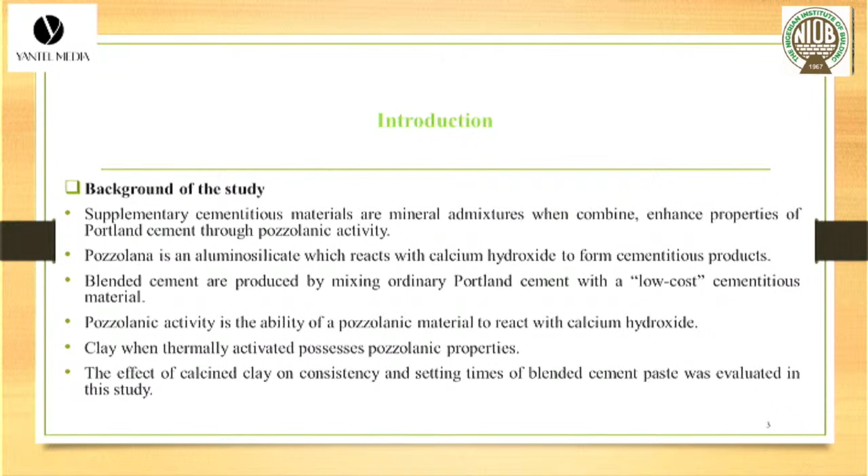So, statement of the problem. Many studies pertaining to supplementary cementing materials have focused more on concrete and often ignored the fact that the paste in concrete also constitutes a considerable percentage of the total concrete volume, as well as vulnerable to chemical attacks. The next slide, please.

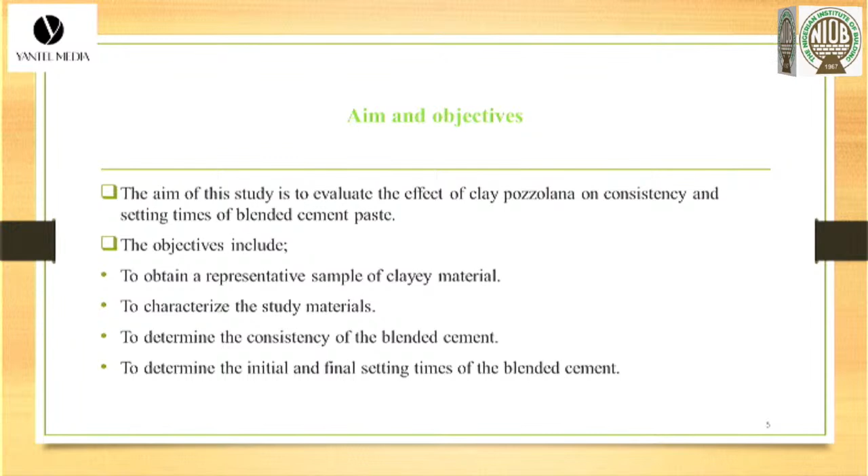So the aim of this study is to evaluate the effect of clay pozzolana on consistency and setting times of blended cement paste. The objectives include to obtain a representative sample of clay material, to characterize the study materials, to determine the consistency of the blended cement, to also determine the initial and final setting times of the blended cement.

The use of pozzolanic materials in cementitious systems has gained significant attention due to their potential to enhance the performance and sustainability of concrete. And consistency is a function of setting time and also relates to hydration of cementitious materials. Thus, the setting time of pozzolanic material is also a measure of its pozzolanic activity or pozzolanic reaction.

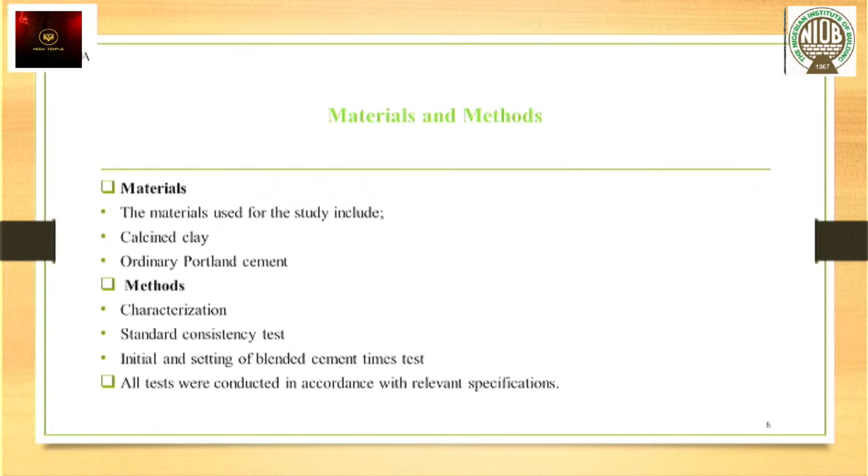after which the mixture of the clay and the palm kernel shell was noodleized in an equipment known as the noodleizer. After the noodleization, the noodleized product was fired in a purpose-built kiln in the NBRRI Pozzolana pilot plant at Ota, Ogun State. Next slide, please.

Results and discussion. Table 2 shows the chemical composition of the clay, which from the results you can see that the silica content in the clay material that was calcined was 63.36%, and the other oxide that was present in the clay in considerable quantity was the alumina, which is aluminum oxide, that has 16.36%, followed by iron oxide with 5.44%.

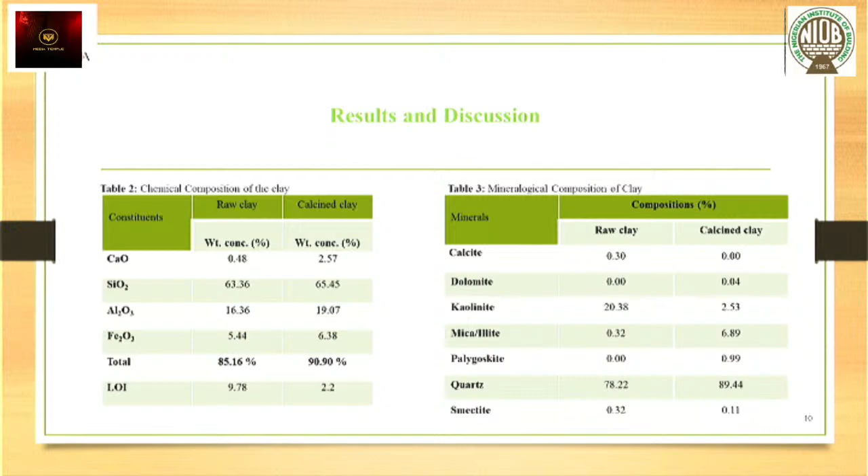So, figure 2 is the plot of the standard consistency of the calcined clay pozzolana OPC paste. So the consistency of a binder paste is the measure of the degree of wetness or fluidity of a prepared paste. It is the water affinity of the cementitious material. Thus, the consistency is a function of setting times of cementitious material. So the figure here shows the consistency results of the effect of the clay pozzolana when it was blended with the OPC.

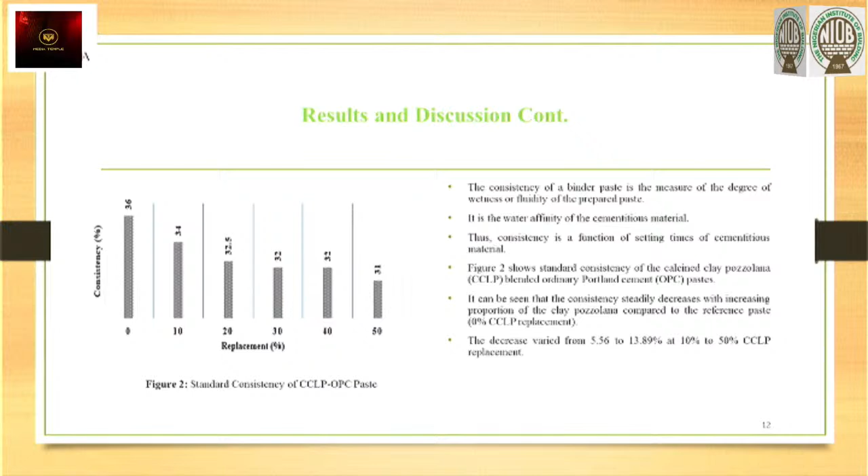And it can be observed that the consistency steadily decreases with increasing proportion of the clay pozzolana compared to the reference paste, which is the 0% addition of clay pozzolana. The replacement levels were at 10% replacement of the pozzolana by weight of the ordinary Portland cement, 20%, 30%, 40%, and 50% respectively. The decrease varied from 5.56 to 13.89% at 10% to 50% calcined clay pozzolana replacement. The next slide, please.

So figure 3 here is the plot of the initial setting time and final setting time of the calcined clay OPC blend. Setting time, as we know, is the time required for stiffening of cement paste to a defined consistency. Stiffening, on the other hand, is the loss of consistency by plastic cement paste and is associated with the slump loss in concrete. The initial setting time is the time when cement paste starts to harden, while the final setting time is the time when the cement paste has hardened sufficiently.

So from the plot here of the initial and final setting time of the calcined clay OPC blend, it can be observed that the initial setting time decreased by about 62% at 10% calcined clay replacement of the control, which is the paste without the calcined clay. However, the initial setting time increases with proportion of the calcined clay pozzolana, such that at 50% calcined clay replacement, the initial setting time decreased only by about 54% of the control.

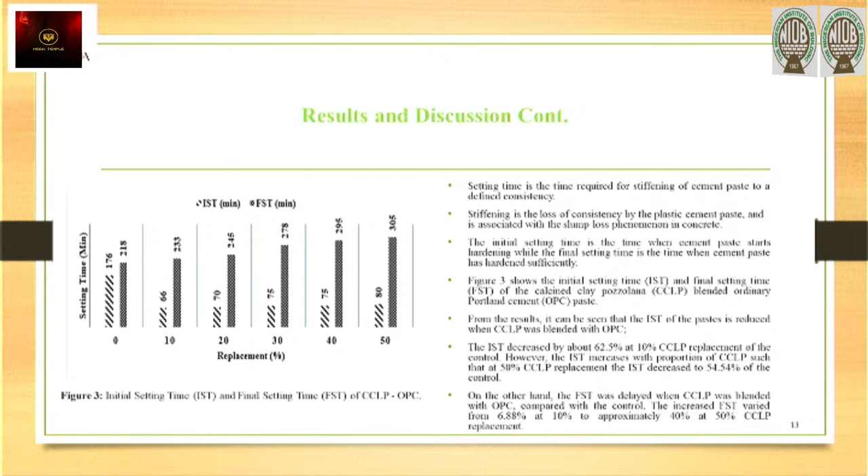So in conclusion, the chemical characterization of the calcined clay showed the materials possess pozzolanic properties. The mineral composition revealed the raw clay belonged to kaolinitic clay mineral. The calcined clay pozzolana decreased the water requirement, which is the consistency of the calcined clay blended ordinary Portland cement paste. In this case, the clay pozzolana acted as a water-reducing admixture.

The initial setting time is reduced, while the final setting time was delayed when the calcined clay pozzolana was added to the OPC. Therefore, the clay pozzolana can serve as a set retarder, which can be utilized in hot weather concreting.

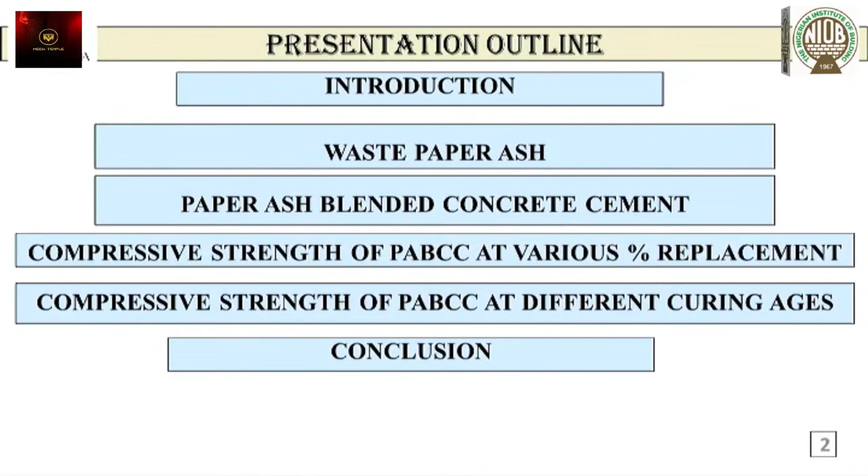Now, Portland cement is the most used binder in the world. It's used for building, construction, and civil engineering, construction of jetties and harbors. And due to the fact that this material is mainly utilized as a major binder, it has led to a major depletion in the natural resources. Next slide, please.

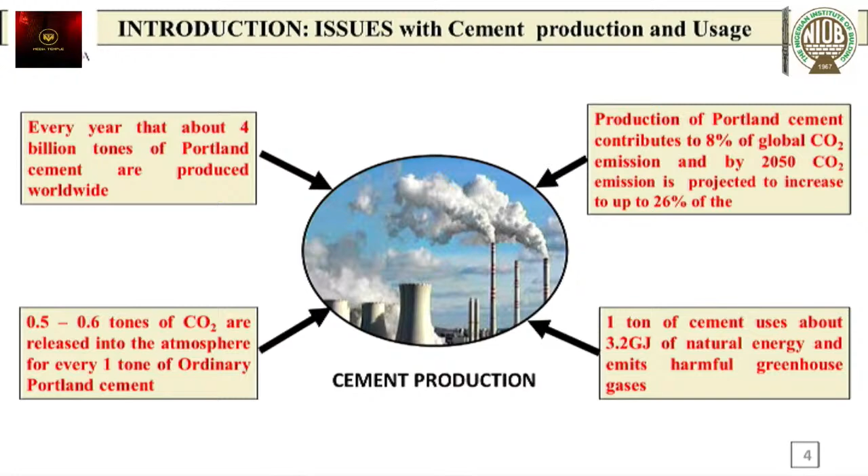If you check our environment very well, if you observe our slabs, or in an environment where you have ingress of moisture in concrete, where you have harmful minerals in the soil, once you have an ingress of water in your concrete, it triggers a chemical reaction where you have this spalling, and at the same time you begin to experience rust on your reinforcements. Next slide, please.

Now, these are problems that are associated with the production of cement. One, we have the depletion of natural resources that I've mentioned earlier. Also, the level of energy that is consumed during this production process, the production cost, and the effect that we have on the greenhouse gases. As a result, this has pushed many researchers to look into different innovative means to produce alternative materials that can be used to replace cement, so that we can have a more sustainable building construction material.

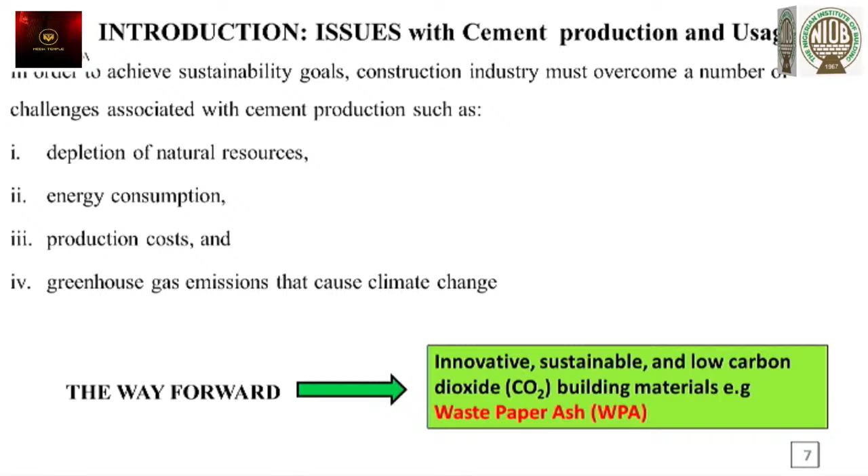And as a result of this, one of the major materials that was considered as an alternative sustainable material is waste paper ash, which we are considering in this study. Next slide, please. Now, waste paper ash is generated from the incineration of waste paper. Waste paper ash could reduce the CO2 emission associated with the production of Portland cement.

Now, we can see the analysis of the waste paper ash. We have the physical property analysis. The density is stated as between 2.2 to 2.9, and also the dry density, water absorption, specific gravity and bulk density. Also, the average moisture content is stated here.

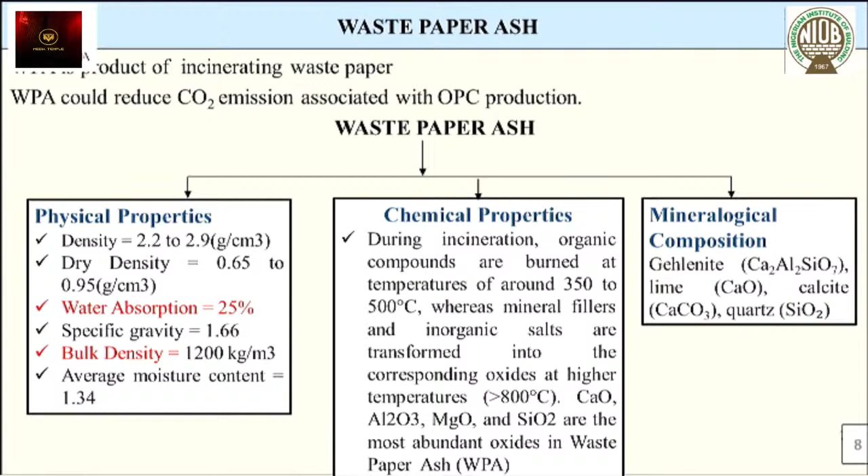Now, if you check the chemical analysis for the waste paper ash, during the incineration of this waste paper, the organic compounds are burned at a temperature of about 350 to 500 degrees Celsius, where all the mineral fillers and inorganic salts are transformed into corresponding oxides. You can see the oxides, aluminum silicates, aluminum and silicate oxide. All this makes this waste paper ash a good pozzolanic material because of the chemical content. Also, the mineralogical composition, we have gehlenite, lime, calcite, and quartz. Next slide, please.

Now, this waste paper ash was used in this research to substitute for Portland cement in the production of concrete at various percentage replacements ranging from 5% to 25%. The mix ratio adopted is 1:4, and a water cement ratio of 0.5 was used in this research. As you can see from this graph, for the various percentage replacements of waste paper ash in the concrete, you can see the strength development for 7 days, 14 days, 21 days, and 28 days.

Now, at 5% replacement for 7 days, there is a high gain of strength in the concrete. You can see from this graph about 65% gain of strength in concrete where we have a 5% replacement of cement with waste paper ash. And also at 21 days, you can see that there is a significant increase in the compressive strength of this concrete. Also, you could check at 10%, 15% and 20% replacement.

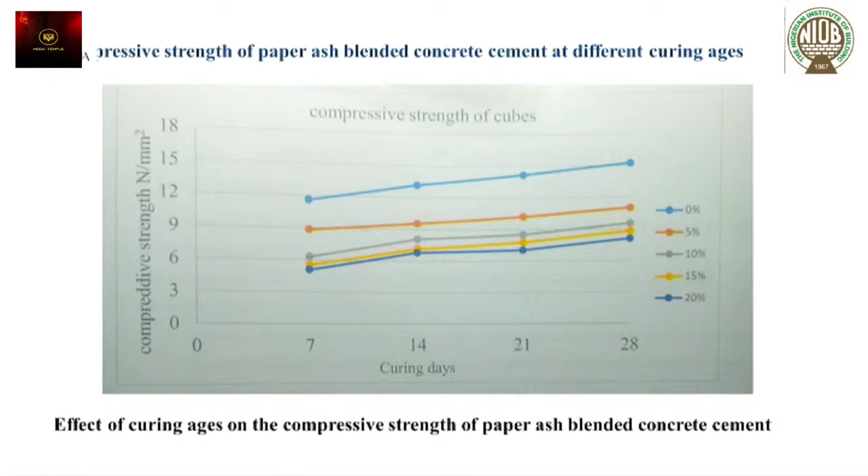This tells us that our waste paper ash exhibits pozzolanic characteristics, where we actually have a refinement in the pore structure of the concrete, which eventually leads to an increment in the compressive strength of the concrete. Then also, the mix was, however, less workable compared to normal concrete because of the introduction of waste paper ash. So definitely there will be a need for another test to determine an appropriate water cement ratio for that kind of concrete.

Next slide, please. Then also, the mix ratio, the water cement ratio, should be fixed, like I earlier mentioned. Then finally, future works in this direction should only be carried out if raw materials and other facilities and equipment, for example, blast furnace, are locally available, and the various operations, burning, chemical analysis, and so on, can be well monitored and supervised so that we can arrive at a material that we can recommend as being sustainable and durable. Thank you for listening.

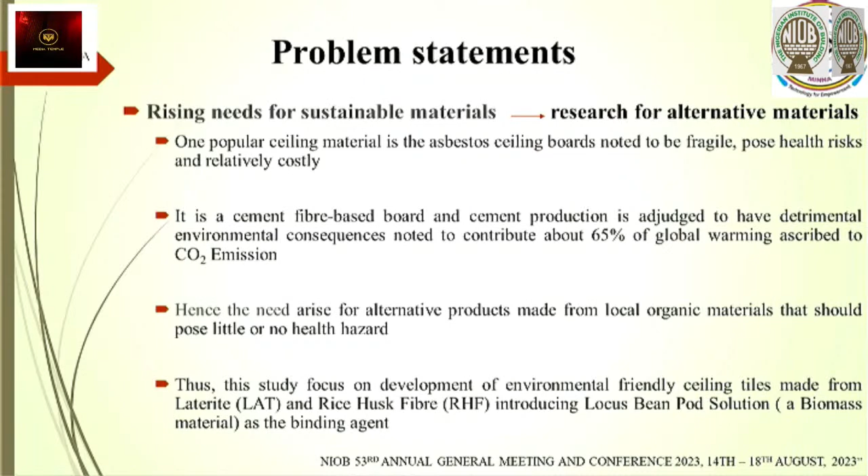Now, materials and method. The materials, as I mentioned, are the Portland cement, lateritic soil, rice husk fiber, and LBPS, that's the locust bean pod solution. We looked at material characterization, that's to look at what are the characteristics of these materials. We carried out particle size distribution on laterite and the rice husk fiber.

We carried out XRF, that's X-ray fluorescence, on laterite and the locust bean pod solution. We carried out liquid limit, plastic limit, and plastic index test on the laterite, and we carried out moisture content on the RHF and the laterite, and also the specific gravity of the three materials, laterite, RHF, and Portland cement, were looked at.

The experimental program for the matrix material: we varied the laterite and RHF content from 70-30, that is 70% laterite, 30% RHF, then continuously reduced it up to the time we got to 30-70, which is now 30% laterite, 70% RHF, at 10% step intervals.

We also made use of the locust bean pod solution at 50 gram per liter, 30 gram per liter, and 10 gram per liter. And the major test carried out on the tile was the water absorption and the flexural strength.

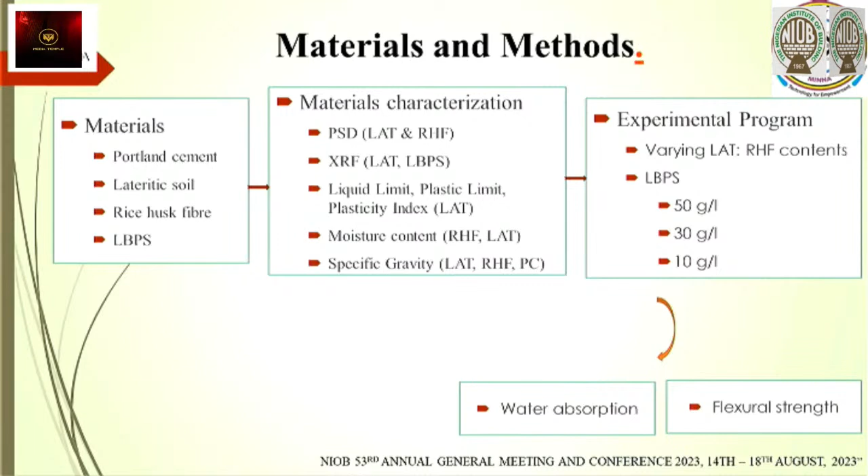Then we looked at 50 gram per liter for LBPS, while we vary, as I told you, the laterite to RHF ratio: 70-30, 60-40, 50-50, 40-60, and 30-70. Then we also have 30 gram per liter for LBPS as binder.

Then we vary laterite at the same proportion, then 10 gram per liter, and we vary laterite and RHF at the same proportion. The binder composite remains 0.6 all through.

For the water absorption test, we used ASTM D743 2013 edition as our standard. The sample size produced was 400 by 400 by 40 mm, and it was kept in the oven for 2 hours after molding before it was cured.

Then for the flexural test, we used a 450 by 450 by 70 millimeter sample, and the code used there was ASTM D1037 of 2012. The specimens were oven dried after 24 hours of casting, under a temperature of 80 degrees for 24 hours, according to established literature.

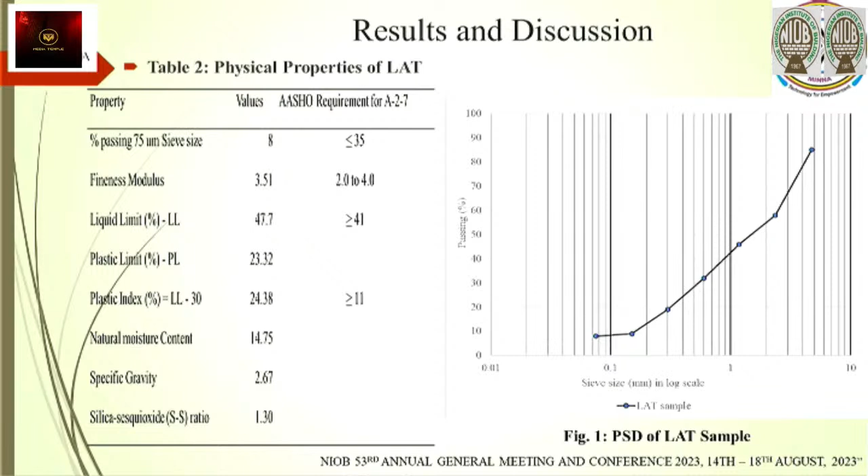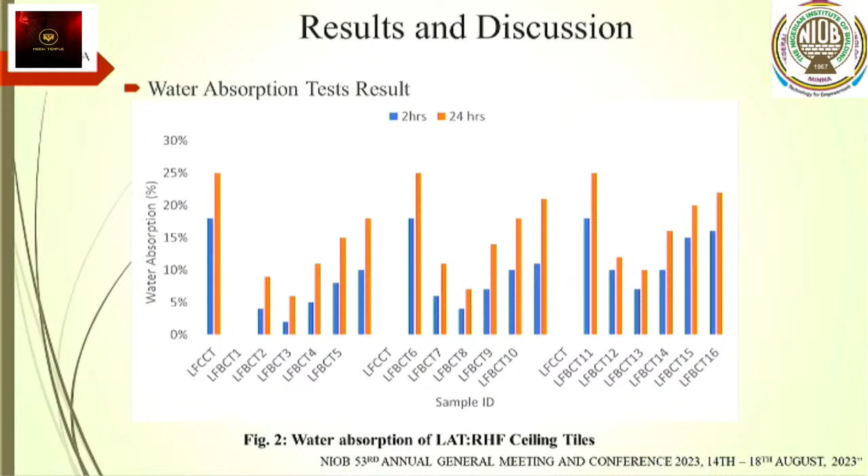We observed that after that 60-40, the trend was dropping. But one unique thing was that the ultimate strength, at 60-40, was also similar to the mix we had for Portland cement — it was also 60-40. But the cement binder had a strength which is double the strength we had for the LBPS binder.

In conclusion, we had the following inferences: the laterite sample used is suitable, with an A-2-7 classification of AASHTO and a class F pozzolana classification of ASTM C618. The LBPS is also class F pozzolan, and we discovered that 60-40 laterite-RHF at 50 grams per liter was the best performing of the ceiling samples using LBPS.

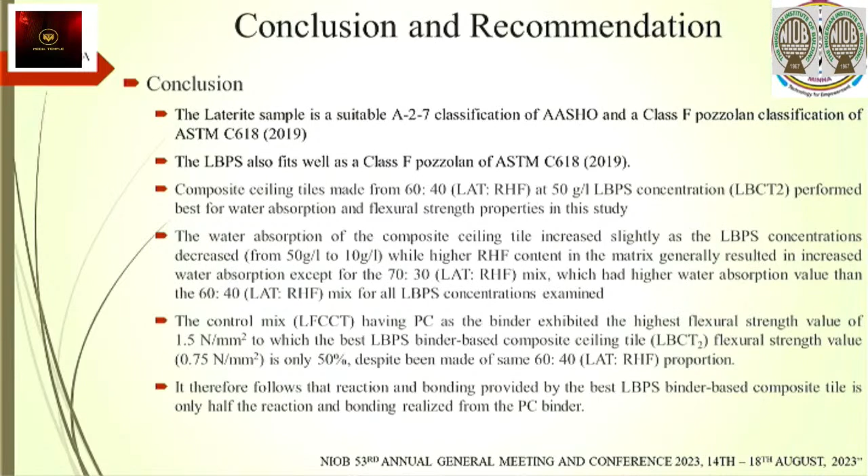So we believe it can still be improved upon. We believe we have not gotten there, but it's an indication that working on 60-40 laterite to RHF, we should be able to arrive at a good tile from this material. So in recommendation, we suggest a binary blend of laterite and RHF with 60-40 composition at 50 grams per liter.

LBPS concentration is recommended for consideration and ceiling tile for good water absorption and flexural strength performance.

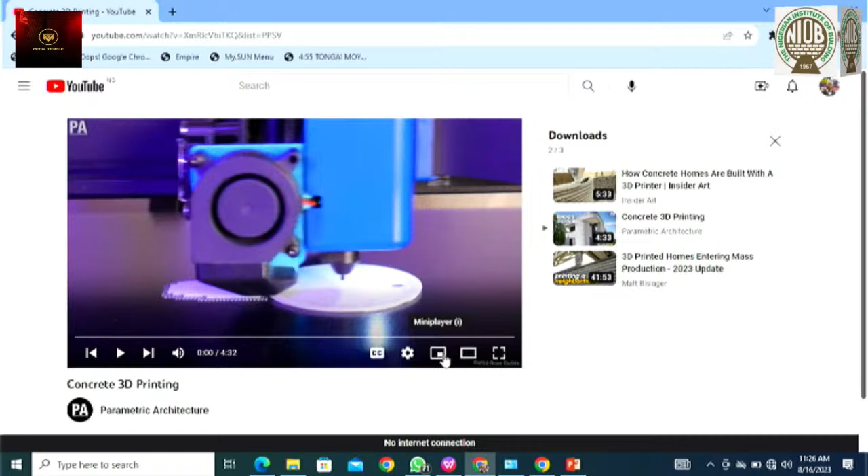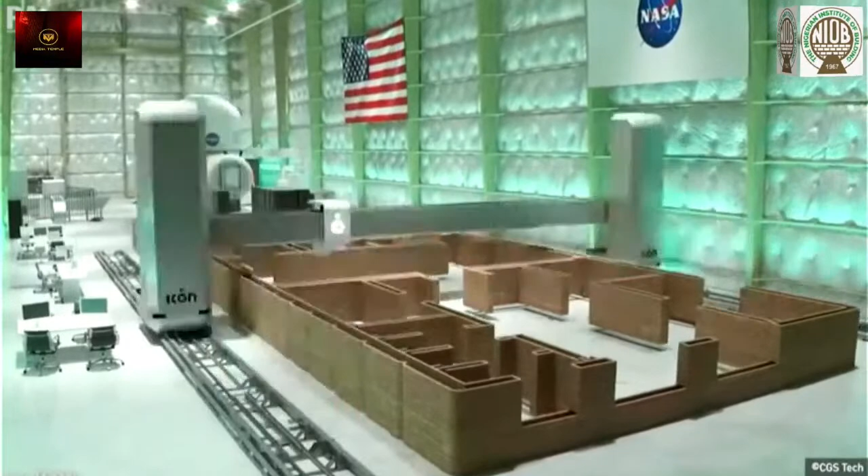What is 3D printing? It's basically about having concrete printed the same way they print plastics or the same way they print images. You can see the picture there. It's showing a nozzle head and concrete is what is coming out instead of ink. We have like 3 videos, but we have just 2 that are not too long that will show us some understanding of the printing process. I already agreed with them, maybe during our leisure time, they will be playing the other one that is long. It shows the complete structure and how the various facets of the building are involved. Just like we could see, these are objects made from the printing process, but this is actually the concrete printing.

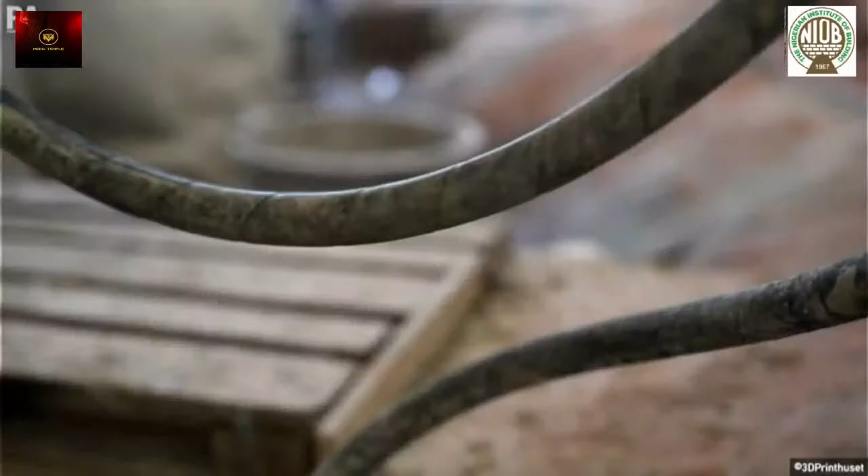You see, it's going from the nozzle and forming our wall in two phases, in layers. There is a need to understand the material processing to be able to have it come out of the nozzle so that it will not be blocked. There is a need to understand consistency so that it will not be too watery and pouring away. There is a need to also understand hardening so that it will not take too long to set, so that you can have another layer come on it.

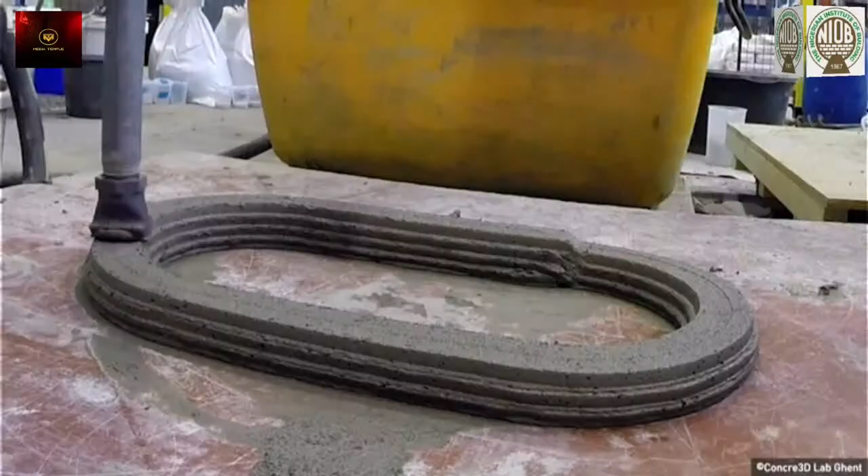And these are the intricacies in concrete 3D printing. Like you could see, the nozzle goes as directed by an automatic base. It is also an introduction of artificial intelligence in construction. It has an idea of coming up with the concept and breaking it into pieces of, okay, what layers do we need first and things like that.

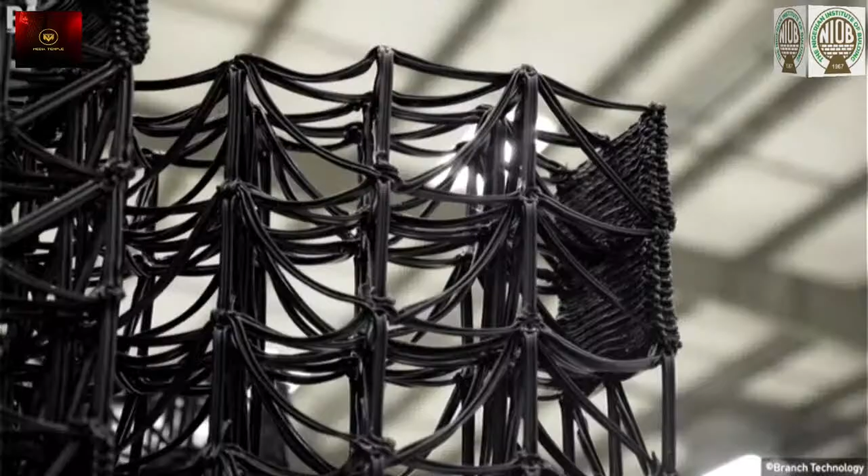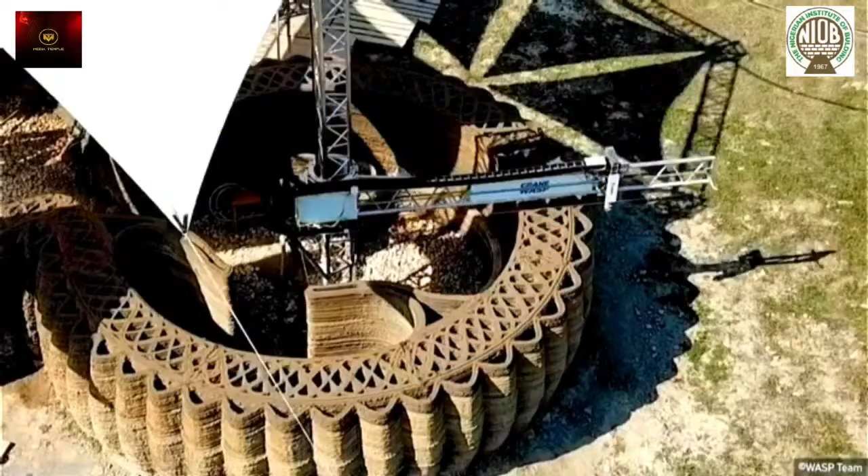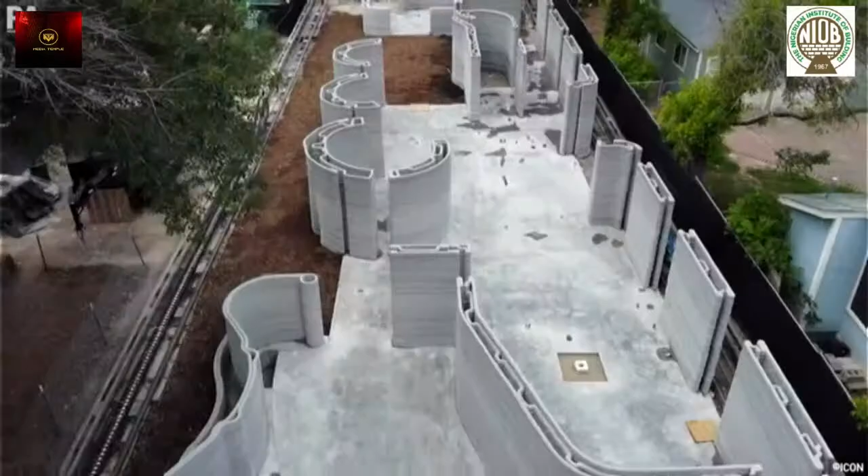But the most important thing for us in this environment, which had made people think it's an impossible task, is how do we get a machine that could print? And how do we get materials that could come out of the nozzles? Like we see in that process, it's conventional concrete materials: cement, sand, water, and aggregates. But you have what we call admixtures that will help modify the water requirement. It has plasticizers introduced, in liquid or plastic form.

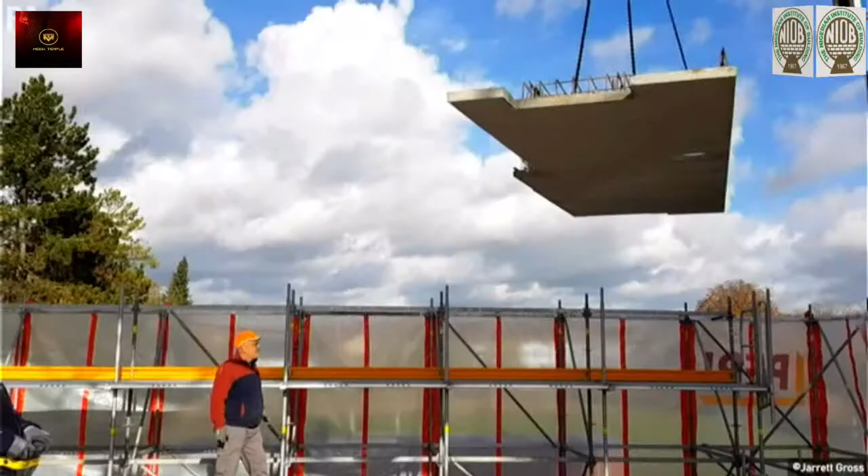All they do is to help it hold on, not to set too fast or too slowly, for you to be able to form your set, and it will give us the concrete we are looking for. We also need to work on the sizes of our aggregates. If we are using coarse aggregate that's too big, our conventional 20 mm, 19 mm, it will be difficult for it to come out of this nozzle. So it has to be finer aggregate sizes.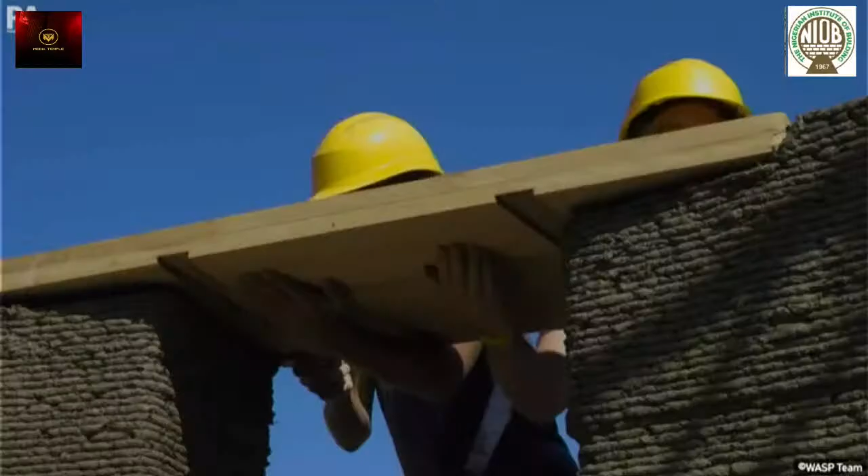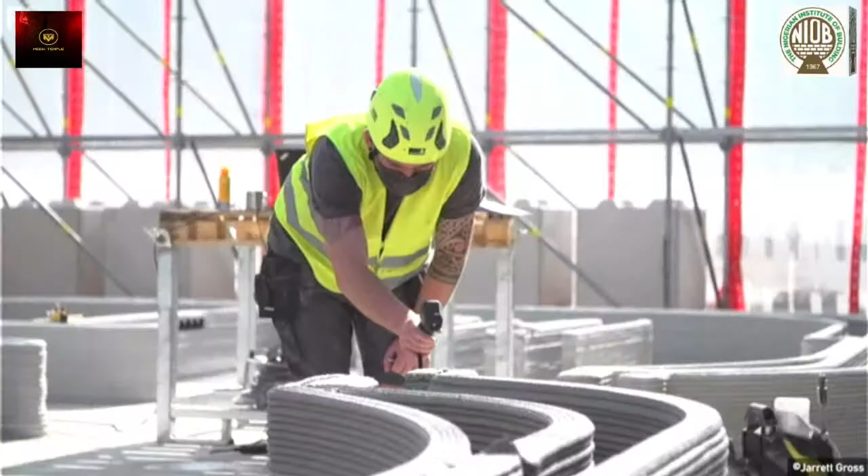My colleagues in concrete know when we talk about self-compacting concrete, we don't go beyond around 8 mm aggregate size because of the ease for it to flow and not to segregate. This also applies here. But beyond having a concrete that will flow, it must also set fast. And that is why the mix has to be what we call the rapid hardening concrete. The concrete they get from this, the second video, will be concrete that gives us strength above 45 Newton per millimeter squared.

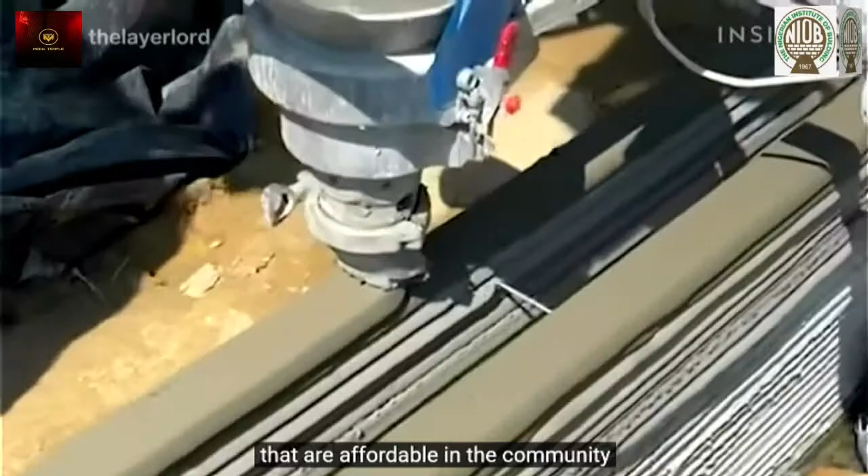Because for it to actually set fast, it must be sticky. Though it's still flowing, you will notice that within a few minutes, it has begun to dry. And that is why they could come up with another layer. It goes layer by layer, and it looks, of course, close to our brick setting. But the only basic thing is that you have a line of wall made together at once, and it requires precision.

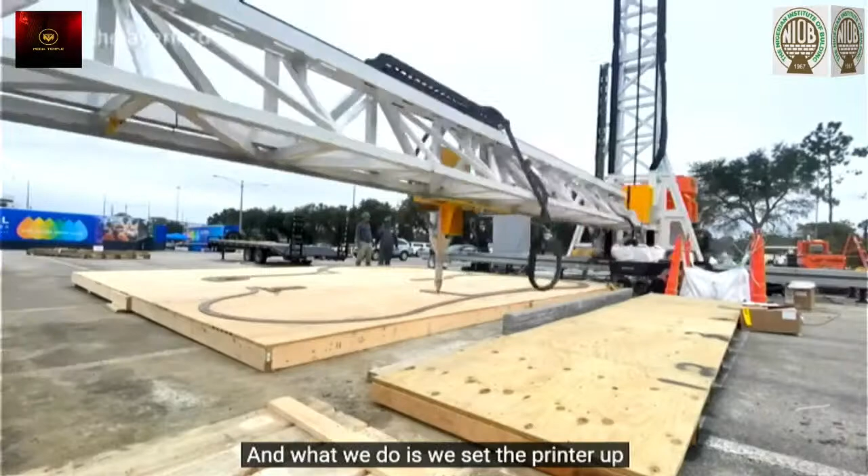It's not something that workers will be lazy about or miss attention. You move your face off, you might have poured away the concrete, or they might no longer be in alignment. And that is why the technology needs to be promoted in our immediate environment.

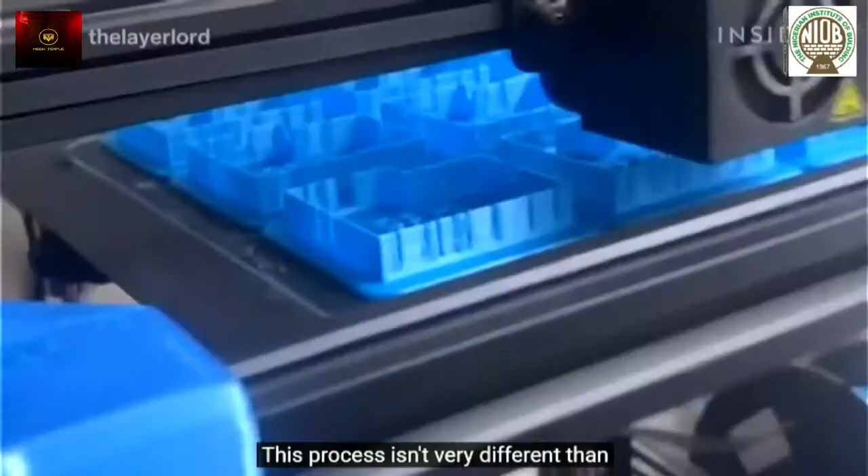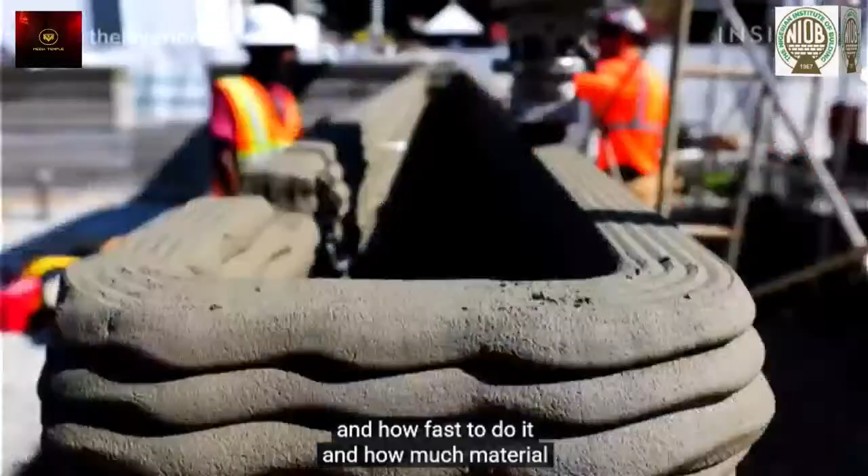I got a fellowship in Singapore. Unfortunately, I was denied a work permit, so I could not go. But I did not stop my interest. My supposed host invited me for online Zoom, and I was involved in their discussions. And I kept relating with people that are privileged to work on 3D concrete. And I want to tell us, we have two of our own builders who are currently involved.

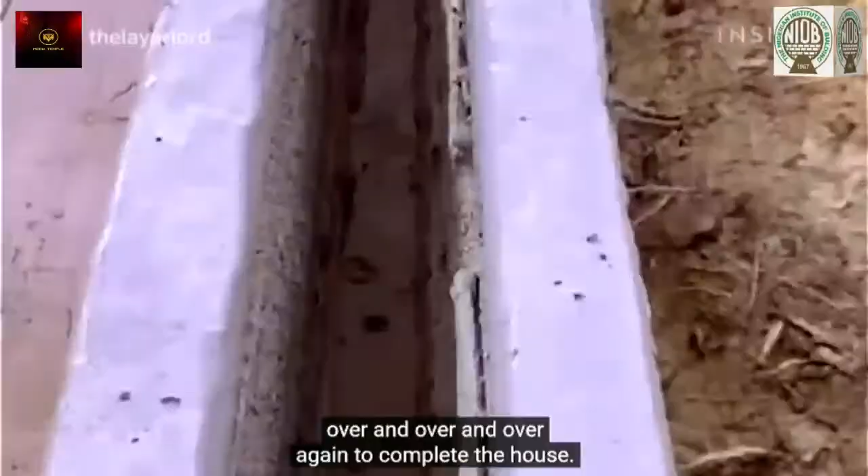We have John Kolawole, who used to be in OAU. After his PhD in Stellenbosch, he's now in the UK as a research fellow on 3D concrete printing. And we have Babafemi, who is currently in Stellenbosch, and he was involved in a 3D concrete mini printer. So the difficulty of getting a printer is getting out of the way, because our people are also getting involved in fabricating the printer.

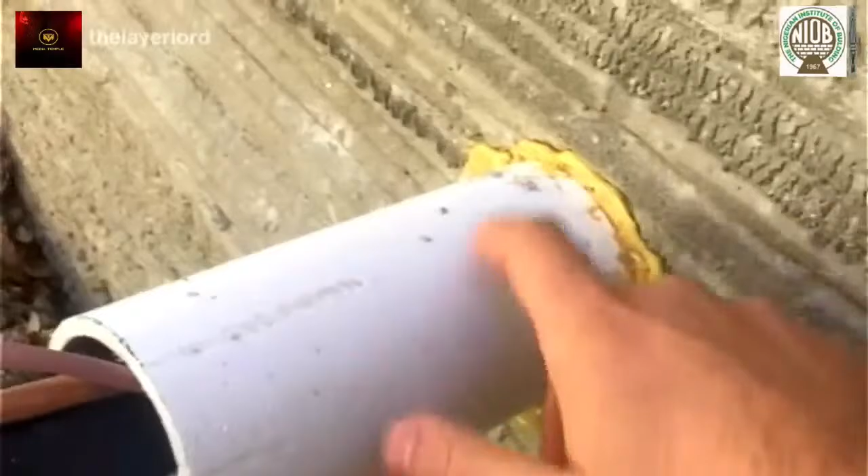And you will notice that it has to move at a speed. The speed is controlled from a control room, which is like the computer, and it could either be a ball-like extrude from the nozzle or a rectangular shape extrude. And the kind of extrude it comes with is what will give you the finishing you get on the surface of the wall. After finishing, it depends on you, whether you want to still do plaster or tile, you can still do. And if you don't want to, you can leave it as a natural surface finish.

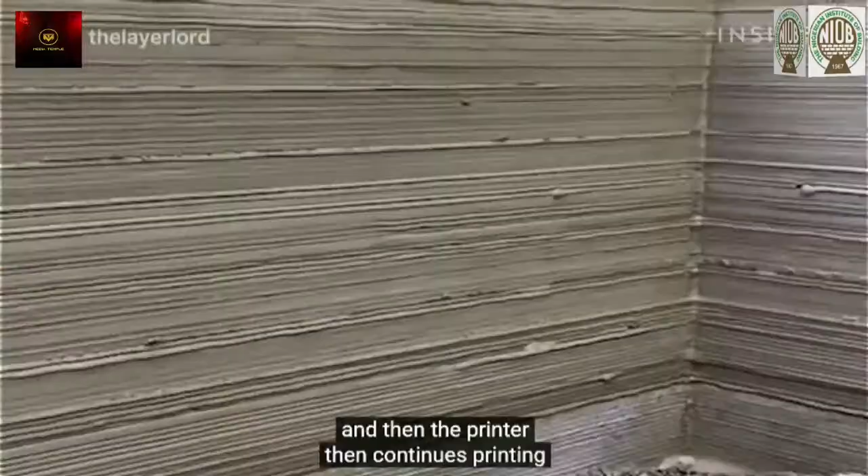Now, what they are casting here is a lintel. So all they needed was just put the formwork, and the machine moves on top of the formwork to form the concrete on top. So within some few hours, some few days, you can have a whole structure in place.

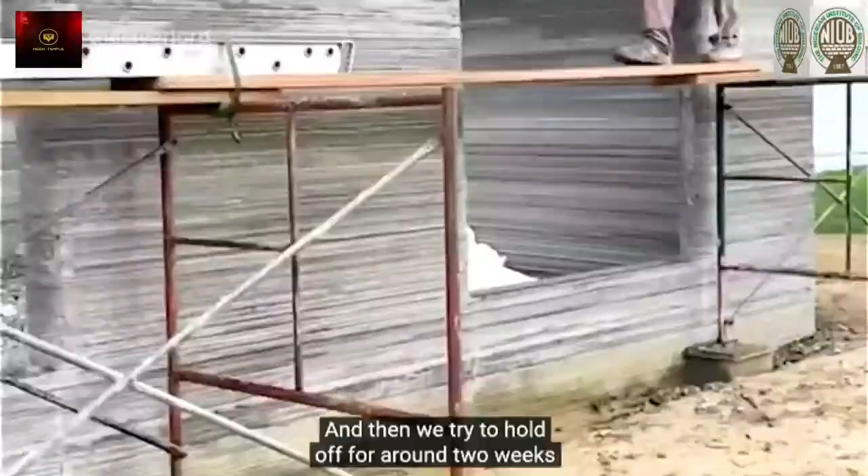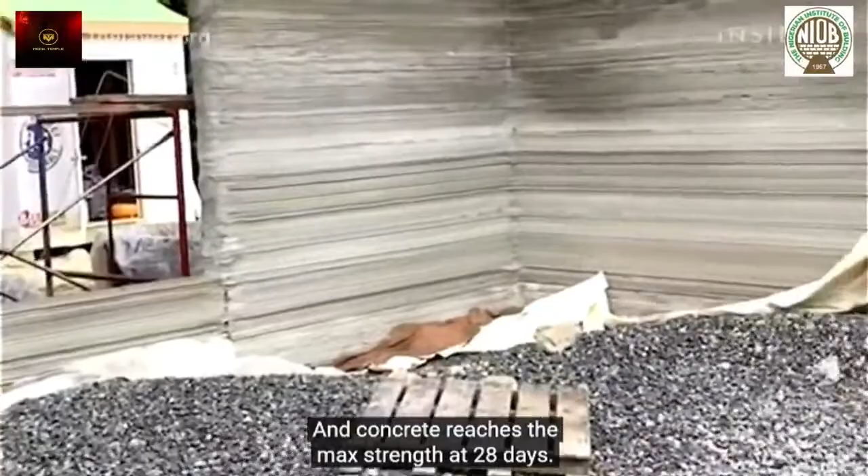Now, what is the challenge to us builders? We need to be more involved in material characterization. Our knowledge of concreting needs to improve. It is not just the concept of pour more water so that it can flow. No, it is now the knowledge of what level of flow am I looking for? What strength do I want to achieve? And what are the materials that I need to bring in?

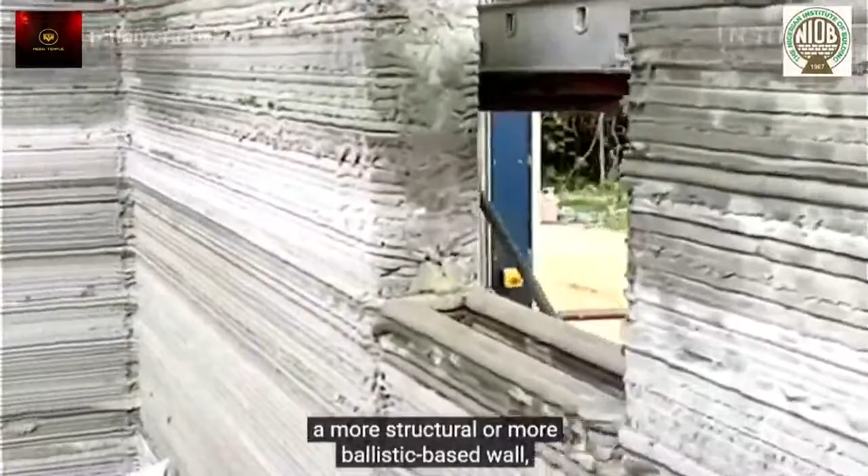For 3D concrete, they also bring in our agro waste materials. In one of the features we saw, what they were pouring in as filler in between the spaces was rice husk fiber. They did not ash it this time, they only shredded it, and it gave us the filler that will fill in the spaces.

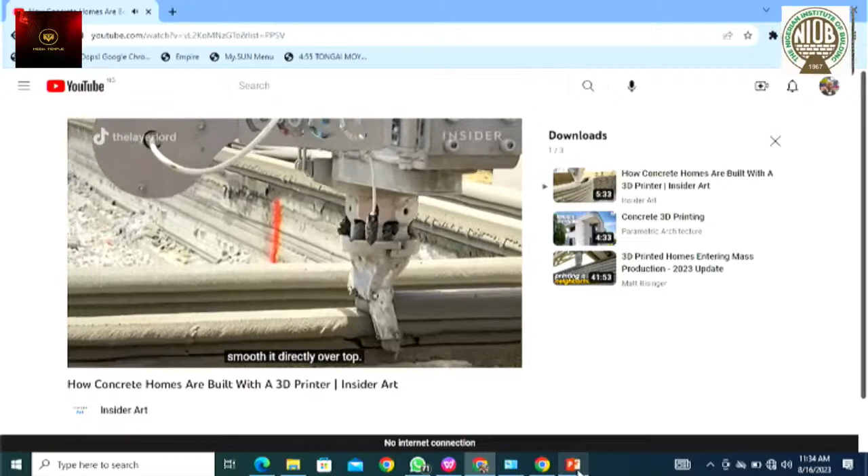But I'll be speaking through some basic things that we need on the slides to have an understanding of concrete 3D printing. Now, that image on the slide shows the concrete printing process. All you have is your nozzle and the concept of what you want to form, programmed in the computer, and with that, it goes along to where you need to go.

Now, the printing process can be either off-site or on-site. Off-site is just the form of our precast concrete concept. But unlike the precast where we still use formwork and the rest, they will make these concrete elements in units through the printing process. And in off-site, they come to site to fix the materials.

Now, in the on-site, you need virtually the same materials, the same process, but the involvement differs. At the off-site, you have the materials brought together, and you have the printer, and it forms the concrete element, which is transported to site for assemblage. But for the on-site, you need to gather the materials together. Major challenge in the on-site is the installation of your printer.

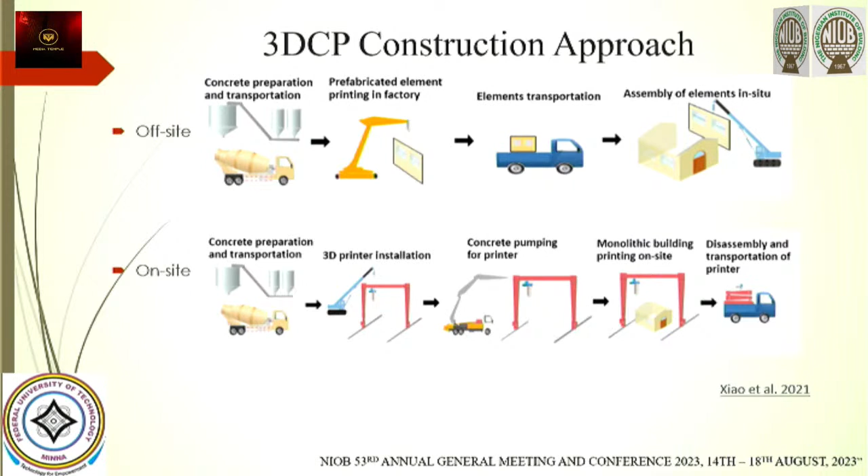The printer will have to be installed with something that is like a frame concept that will have a rail to move along to be able to cast as the printer moves. The printer could be with a hoist that could move long distance, or it could be that the entire rail is moving on it.

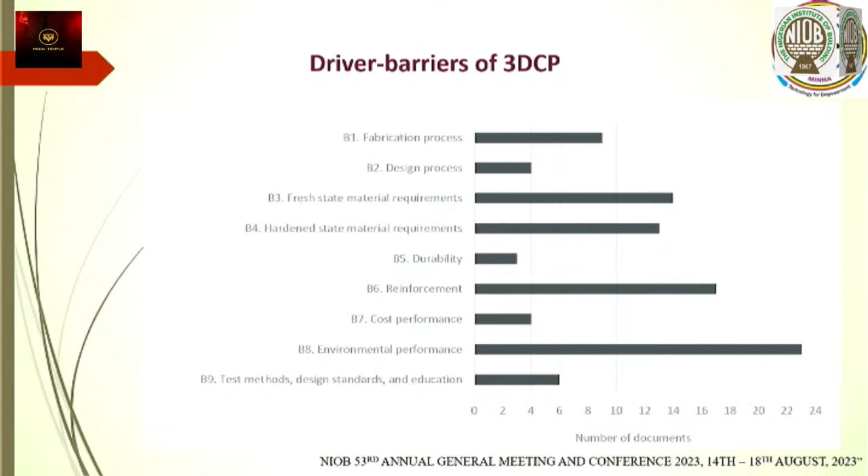Then you have a machine where you feed in the material to your conventional concrete mixer, and you put in all the constituent materials, your plasticizer, depending on slump retention period required, or your retarder or your set accelerator, depending on what you need for the time for the printing of one layer before another layer comes in.

Then you have the code to be generated for the path, the shape, and the speed of printing. And of course, you have the raw materials fed in, and the rest is either your on-site concrete printing or your off-site concrete printing process. Like we could see there, we have the major constraint for now for most of the on-site construction, which is the printer itself.

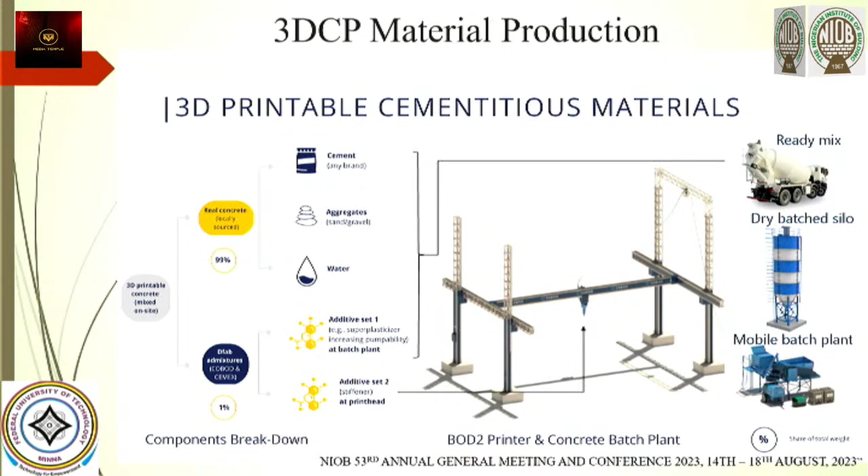Then cost saving is said to be possible because you will have some level of reduction in labor. But this one fear that most of us in the developing countries are having is, will it not take away work from the people on site? But see, somebody will still feed the mixer. Somebody will still be involved in loading the transportation. Somebody will still be given the work of getting the material. So it will still also create employment.

It's only that it will divert our thinking from intensive labor. You want to cast a slab now, you are putting so much number of people, manual workers. No, that will be off. But they will be engaged in other areas. And speed: it actually enhances speed.

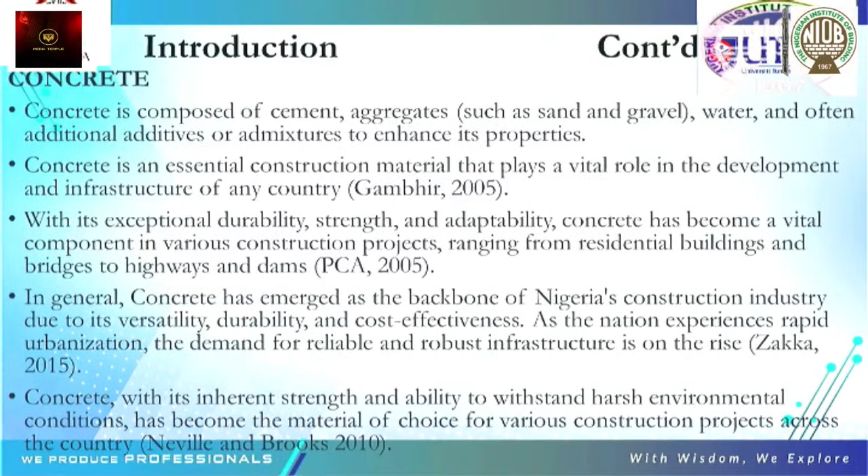Okay. Despite the challenges facing us, authors like Zakka 2015 have made us understand that there are limitations to that. Despite the potential benefits highlighted by scholars in this area of concrete technologies, the industry often relies on traditional practices and conventional concrete mixes.

Understanding and implementing appropriate concrete technology options is essential for sustainable and durable construction in Nigeria. Hence, exploring technology options and applications in concrete in Nigeria is becoming imperative. This study, being a literature review, intends to look at concrete technology, including innovative materials, construction techniques, and sustainable practices that have revolutionized the construction industry.

Based on various authorities in these areas, they were able to come up with areas where production should be looked at. One, high performance concrete, which is engineered to possess superior mechanical properties, including high strength, durability, and enhanced workability. Other areas are self-compacting concrete, fiber reinforced concrete, and green concrete.

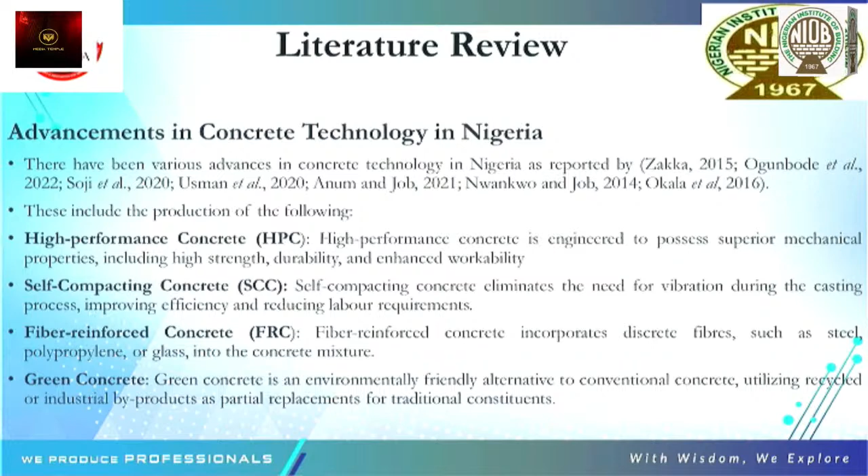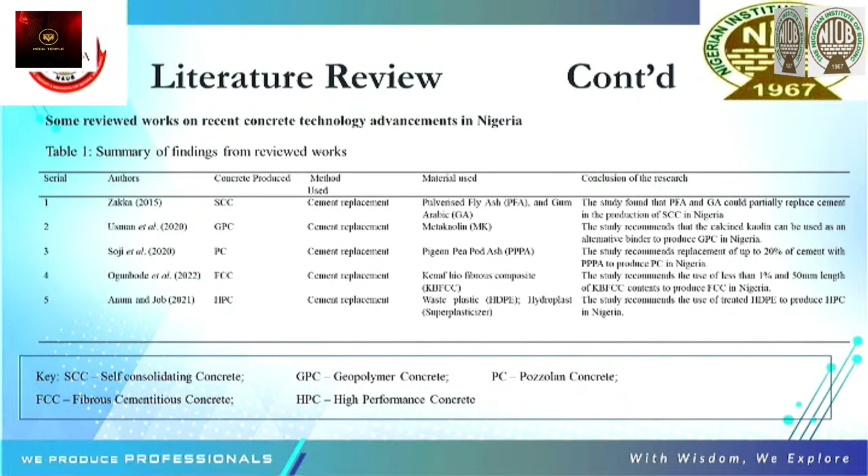A few reviews of this topic have been made by some authorities, among them Ogunbode, whose work covered the materials used. The methodology, as mentioned from the beginning, involved extensive literature review and site visits, then interpretation, followed by results and discussion.

Despite the potential benefits offered by innovative concrete technology, the industry often relies on traditional practices and conventional concrete mixes, which is in tandem with the report of Usman and Ogunbode. Some key issues discovered as challenges in this area are limited awareness and knowledge, and resistance to change.

Even for the few researchers who have done something profitable, adoption of this knowledge that they have shared is another challenge. So we have the challenge of inadequate research and development, and challenges on environmental impact and sustainability.

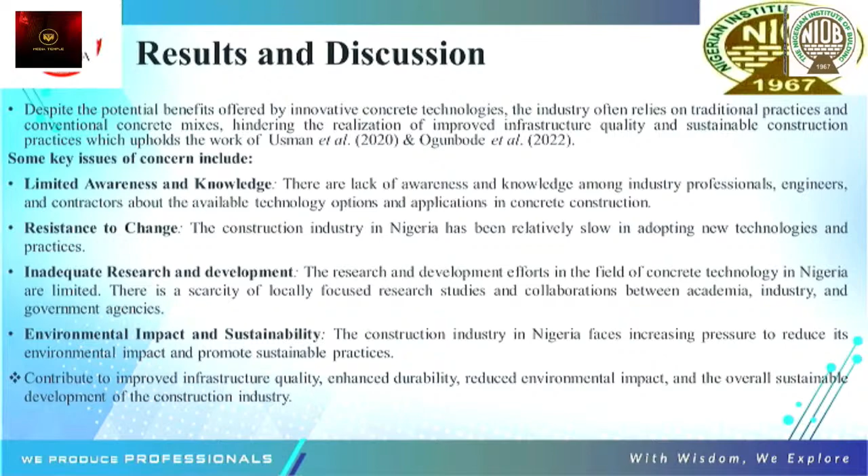After the challenges, we now look at the prospects of concrete technology application in Nigeria. The areas that can benefit from these technology applications include infrastructural development, residential and commercial buildings, industrial facilities, renewable energy projects, education and health facilities, and heritage buildings, among others.

In the course of the research, we discovered areas that need to be explored and are not being made known to the public, including high-rise construction, sustainable infrastructure, smart cities, mass housing projects, and research and development.

In conclusion, from all we have gone through, and seeing the extensive benefit to be derived if adopted, we discover that continuous education and training is one of the ways forward. I must applaud NIOB and CORBON for championing this cause among other professional bodies in the country, creating forums like this for us to share knowledge and better our society. Another way forward is collaboration and knowledge sharing.

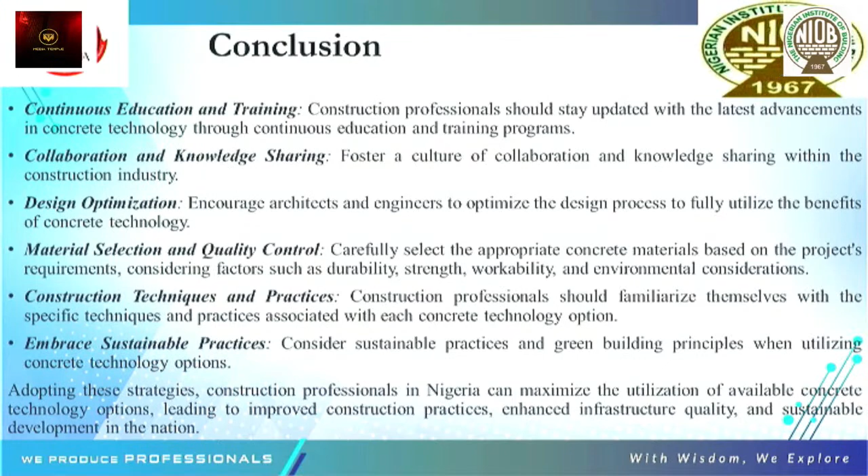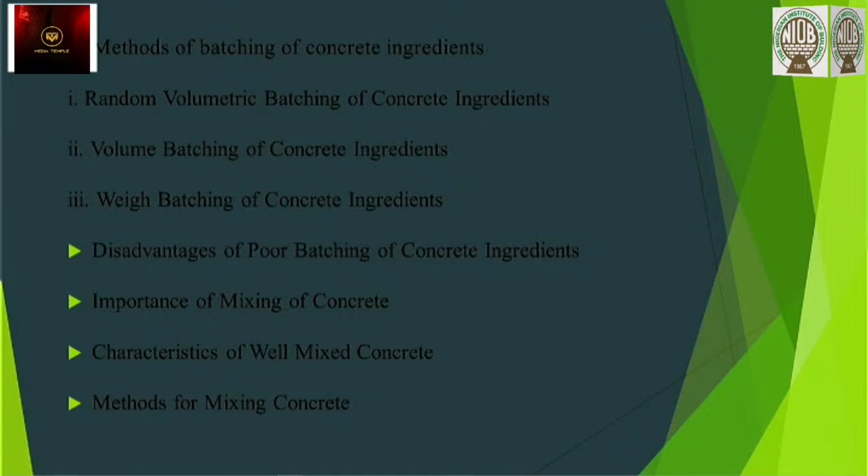Some factors attached to concrete mix are the location of the concrete site: is there sufficient land for the construction activity, is there available space for the concrete batching to be put in place, the volume of concrete needed, and the materials used. This research was based on literature reviews and other conference materials within the Northeast, specifically the capital cities of Adamawa, Bauchi, and Gombe.

Some of the challenges identified in the process of our findings: there are inadequate infrastructures and logistics in the process of concrete and cement production on site. We also have limited availability of raw materials, lack of technical expertise and training. We need to train ourselves - it's not just about mixing sand, cement, and aggregate, but we need to ensure there is quality, standard, and durability.

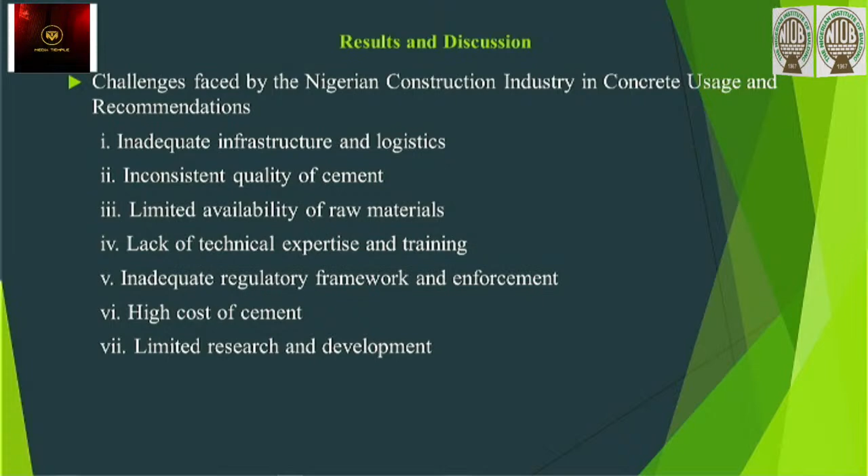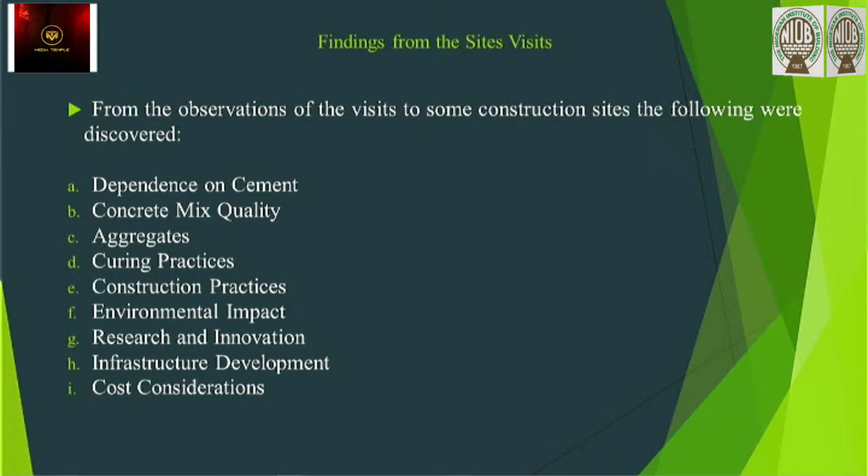Findings from the site show that major challenges depend on cement and concrete mix quality, aggregates, and curing practices. This is one of the major challenges we need to understand - it's not just about casting, we need to cure our concrete so it can acquire the minimum strength expected.

From the conclusion of our presentation, it was recommended that there is need to establish cement and concrete management teams on site. Registered built industry professionals need to be fully involved in construction sites, and skilled and unskilled labor need practical orientation in the process and application of handling cement and concrete production on site.

Thank you. With this presentation, I believe we need to have the practical application of our cement and concrete on site. I so submit.

Good afternoon, Chairman, ladies and gentlemen. My name is Ayeba Ferdinand Fidelis. I'm a student of the Federal University of Technology, Minna, presenting ongoing research on the evaluation of bearing strength of lateritic soil mix for foundation application.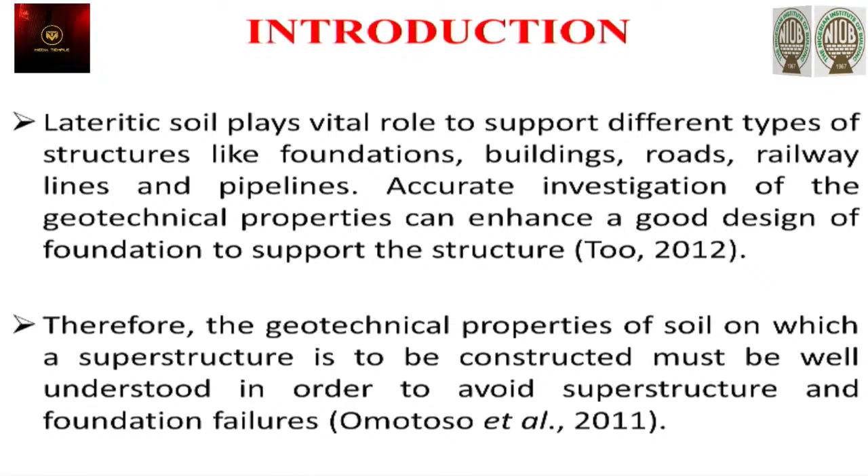The materials required for this research are: lateritic soil, Portland cement, and borehole water.

The lateritic soil has these properties: color, which is reddish brown; specific gravity, between 2.64 and 2.68; composition of cement with soil, between 2 to 12%; moisture content, 8.43%; plasticity limit, 14.11%; liquid limit, 37.40%; and so on. The major interest here is the AASHTO classification.

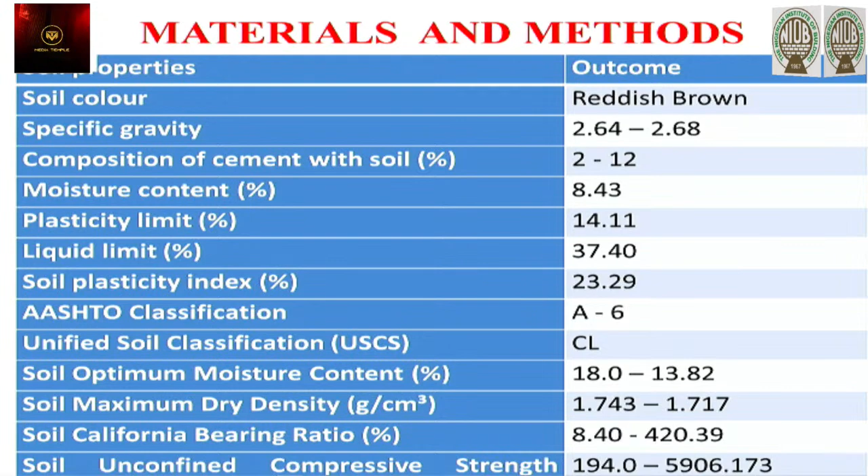The sieve analysis of the lateritic soils obtained gave a percentage retained between 2.63% and 23.52%. That is safe because it falls within the acceptable range of the Nigerian General Specification for Highway 2000, of not exceeding 35%.

What we have on the screen is the summary of results of compaction characteristics of the lateritic soil subjected to test. The MDD, that's the maximum dry density, and the optimum moisture content, OMC, are the two main compaction characteristics of laterite.

It all reduces until it got to 8% cement, which is the highest, and is considered the acceptable soil, based on the research, that can be used for subgrade and base course material for road pavement.

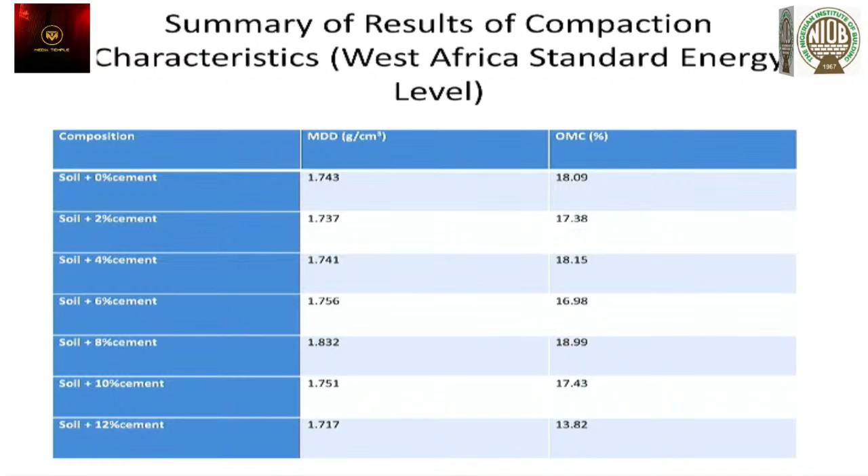The next is the summary result of California Bearing Ratio for West African standard energy level at 7-day curing. This test was subjected to 7 and 14 days. In the course of the study, it was discovered that materials subjected to 14 days curing were of better stability than the 7 days curing.

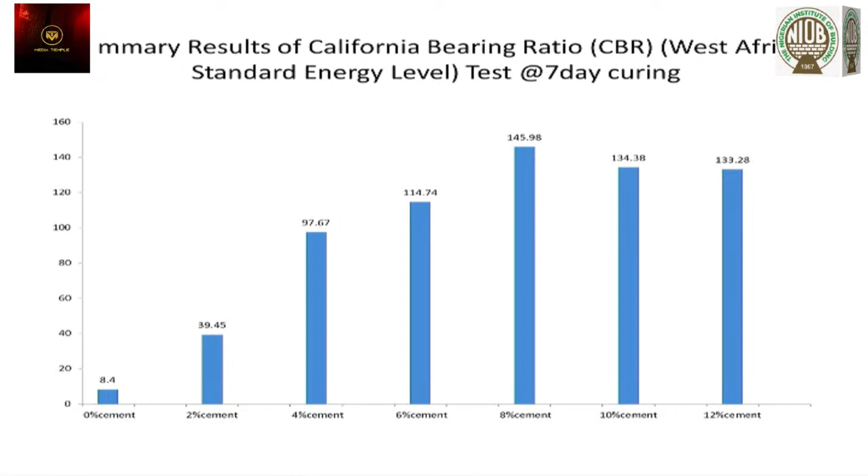It's still on the 8% cement stabilization that we got a better result, meaning 8% stabilization is recommended to be used as pavement for road construction because it will be able to withstand whatever load comes upon it.

The unconfined compressive strength test was done for 7, 14, and 21-day curing. From the result, it's still 8% stabilization that met the requirement for Highway Design 2000.

Conclusion: from the study carried out, we came up with this conclusion, that the index property of soil reveals its unsuitability as road construction material based on the A-6 classification of AASHTO, thus necessitating their enhancement for such purpose.

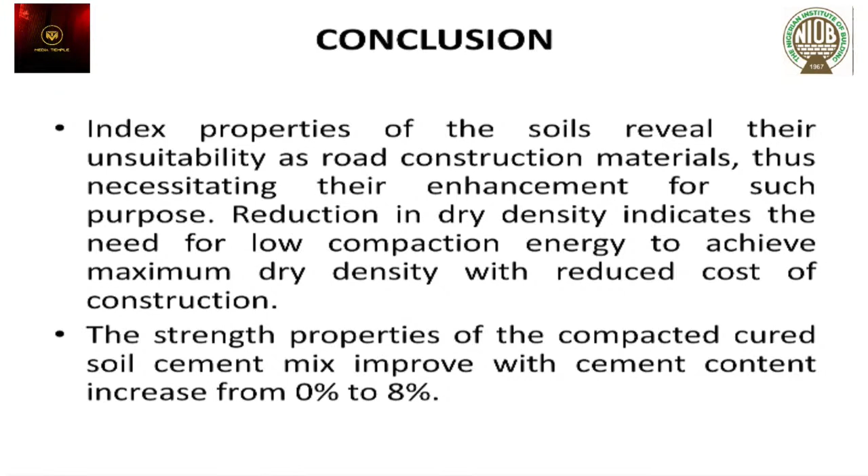Reduction in dry density indicates the need for low compaction energy to achieve maximum dry density with reduced cost of construction. The strength property of the compacted cured soil mix improves with cement content from 0 to 8%.

Recommendation: soil stabilized with cement above 12% can be investigated to determine if the mixture meets the minimum requirements for subgrade material as specified in local code.

Go ahead. These are some of the projects we executed for some churches, even within the state and outside the state. Dunamis International Gospel Center, Jalingo, Taraba State. The furnishing of Dunamis International Gospel Center, Yola, please, you're a bit fast. Furnishing of the Citadel of Peace, Cathedral in Jos. Next. Go ahead, this is Adamawa. This is the furnishing of a church. Then moving to our products.

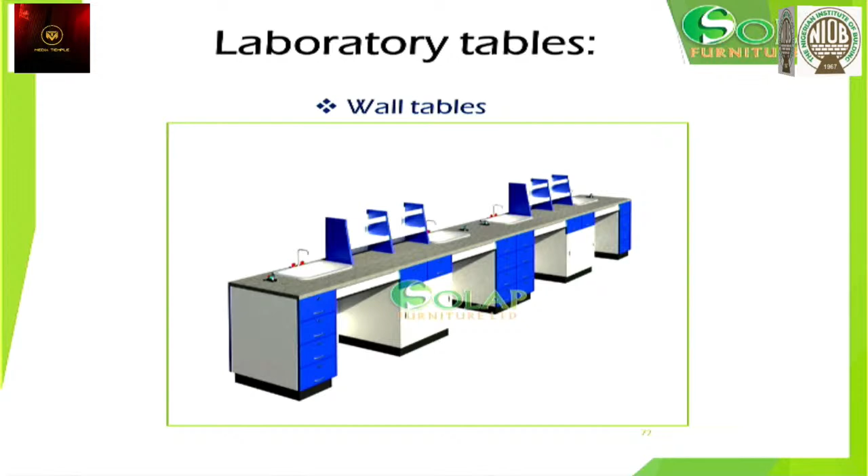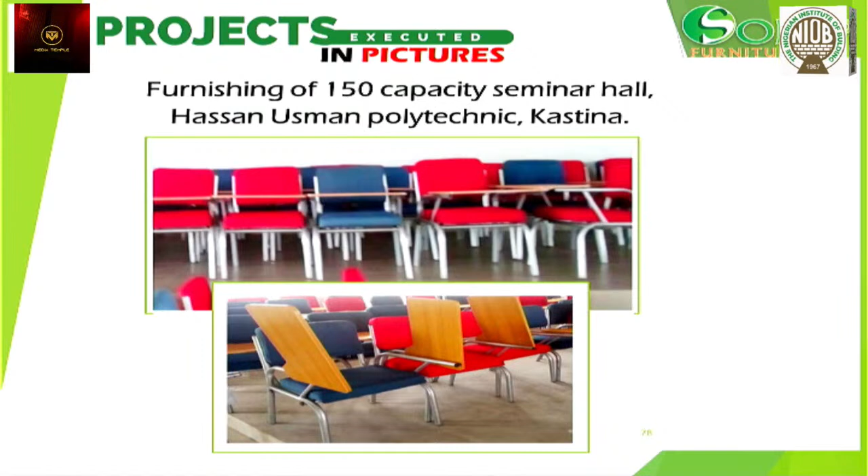These are some of our projects executed, Federal University Lafia, where we furnished their laboratories. Some of our other products include the seminar chairs, like you can see, for the Hassan Usman Polytechnic in Katsina. Next, we have Gombe State. Then, as builders, of course, you agree with me that in contemporary times, the invention of the modern architrave doors is one that you can find in most public buildings and even private buildings. And so we are not left out.

Solap Furniture Limited also designs and produces architrave doors that are very durable and can last you quite a long time. We also have student furniture, the hostel furniture. We have the single bunk, a provision for the shelf, the reading table and the chair for the students, to make sure that the students are actually comfortable as they read.

We have the double bunk furniture. We have also the hospital furniture, the examination table. All these are produced and manufactured by Solap Furniture Limited. What makes us unique as a company? I'd like you to be slow on this one.

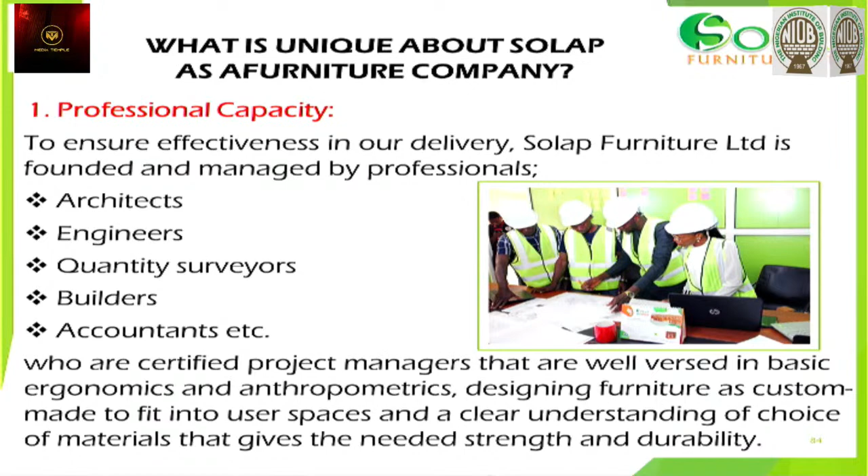Our professional capacity: like I mentioned earlier, to ensure effectiveness in delivery, Solap Furniture Limited is founded and managed by a team of professionals, which includes architects, engineers, quantity surveyors, builders, accountants, and the likes. Our technical: we have also artisans, carpenters, welders, leather designers that work to give us the very best.

Our machinery: of course, we have state-of-the-art machineries, some of which you can see displayed on the screen, the industrial edging machine and the likes. Keep going. The industrial compressor, our sewing machine for the upholstery section. And of course, what our clients stand to benefit is free delivery. We deliver to every part of the country, with addition of 1 year warranty for all our products. You can be sure of that.